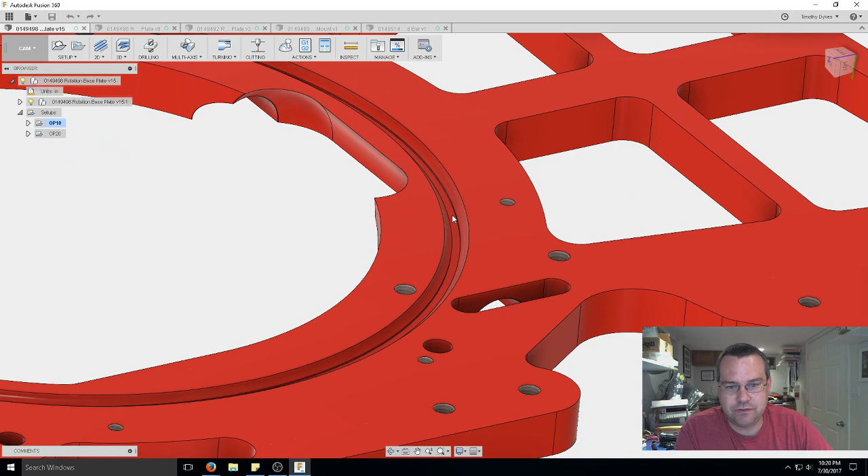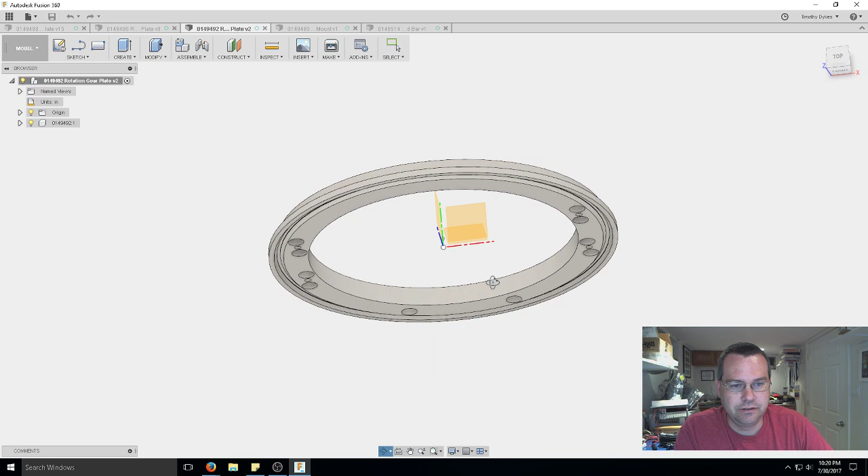experienced machinists. So the way that I was going to hold this down, and this part has to stay fairly flat because this piece is actually a very large bearing race. So they've got this part here. They're going to put 3/16 nylon balls in here, and then they've got this piece here, which is going to be the mating piece to it, and it's got a collar on it, and then the collar bolts into these holes here, and that kind of holds the assembly together.

So both this part and this part need to stay reasonably flat. I mean, it's a high school robot. It doesn't have to be flat within tenths, but it needs to stay reasonably flat. So the biggest problem you have now, this part is 14 inches this way, and it's 8 inches in Y. So 14 inches in X, 8 inches in Y. It's a fairly sizable part. So to get this thing to stay flat during machining is going to be a little challenging.

So I think what I'm going to do is start with, it's 3/8 of an inch thick. So the thickness on it is 3/8, 0.375. That's about 10 millimeters-ish for metric folks. So I'm going to use an oversized stock, and I'm going to clamp the four corners. Now the problem with that is, anytime you clamp the four corners, typically it's going to push up in the center of the plate. So then I'm going to also drill a hole here in the center and put a center hold-down. And I think that should keep it fairly flat.

Now, the other thing that I found is if you get extruded stock versus plate stock, extruded bar stock is almost always warped. I have not received a piece of extruded bar stock that doesn't have at least 20 or 30 thou of warpage in it. Plate stock I found you can get fairly flat. So the other thing I typically do is find which side of the stock is bowing up, and then measure how much it's bowing up, just sweeping an indicator over it. And then I'll throw some shims under it in the center. Typically the corners will be sitting on the table, but either here will be bowed up or it will be bowed up this way. It'll have some bow to it. So I'll figure out how much bow it has and throw some shim stock under it so that when I clamp it down, I'm going to clamp it down in its bowed condition.

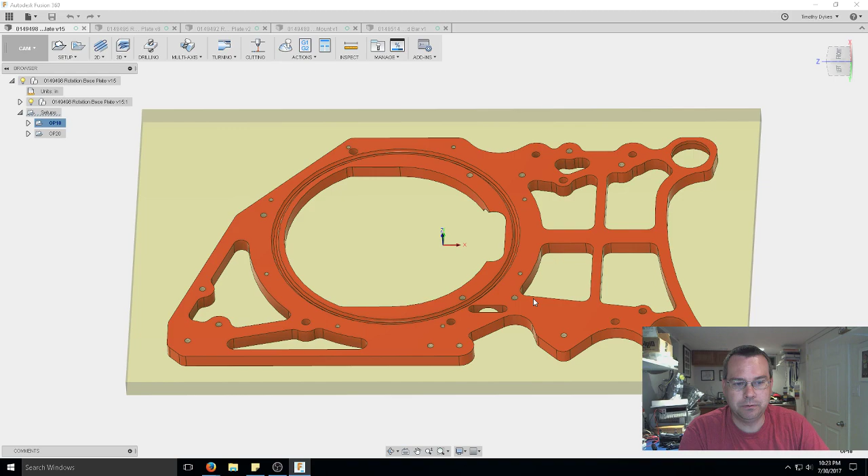So what I found is if you don't do that and you clamp this down, you're going to flatten it out when you clamp it, and then you're going to machine it that way. And as soon as you machine that nice flat surface, when you unclamp it, it's going to spring back, and now your nice flat machined surface is going to be bowed. So you have to try to keep the metal in its relaxed state during your work holding. So that's my thought. And then once you get the first go-around done and you flip it over, now you have a machined flat reference spot to clamp to. So that's my 2 cents on how I'm going to attempt to machine this and get it to come out flat.

Huh, which drill holes, Josh? There's a bazillion of them. So yeah, this part's got a lot of holes and a lot of different sizes. The tool count on this part is nuts. I think I'm up to like 13 or 14 tools.

Oh, thanks, random audio guy.

What are the sizes? So there's a lot of drill holes here. Most of these holes are tapped holes, and all these holes are 10-32. I've actually got most of the CAM done. So all of those holes are 10-32. There are a few holes that are 10-24. Now I asked them, could you order the fasteners that are 10-24 in a 10-32 option? Try to keep everything the same. So I think what we agreed upon is that I'm just going to drill these holes out to a median size that can be tapped with either a 10-32 tap or a 10-24 tap, and just sacrifice some thread engagement on the 10-24 tap.

So those are 10-24s. Then we got a whole bunch of number 6s, so these have to be tapped 6-32. And then we've got some clearance holes for some number 10 screws, so those are those hole sizes. And then we've got some countersinks here. So these are countersinks, I believe, for the 10-24 screws.

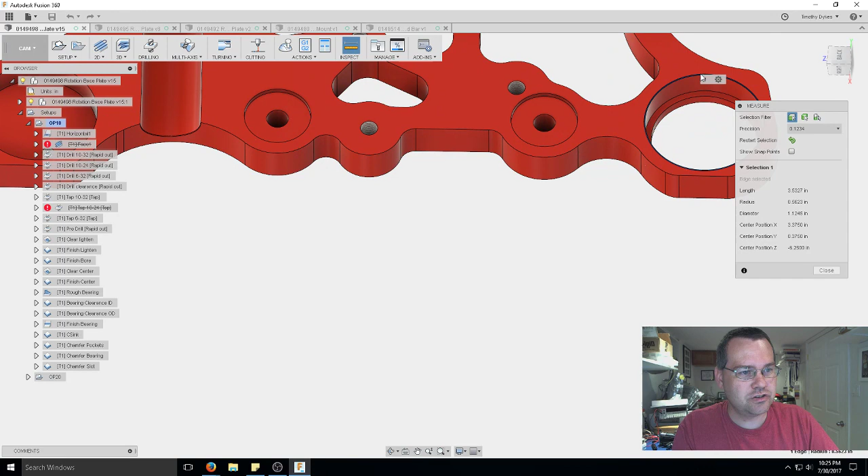And then this bore up here, I believe, is 1 1/4 inches, and that one's 1 inch. Here, let's measure that. So this lower bore is 1 inch, and I believe this upper bore, it's 1 inch on this side, and then 1 1/4 inches on that side, 1 1/8 inches.

So here's the back side of the part. So the back side's even more fun. So the back side has this radius, you know, channel in it. So that, I believe, I'm going to have to ball mill. You know, trying to stand it up on end and do something up on end is not going to be too efficient. So that's probably going to end up getting ball milled.

So yeah, the larger ones are on the outside. Yeah, these are all 10-32s. So yeah, lots of holes. Yeah, you know.

Yeah, Bob, that's exactly what we're talking about, is trying to hold this thing flat and, you know, getting a part this large to come out flat. You know, I'm going to try to get this flat. I'm going to attempt to get it flat within a couple of thou for them.

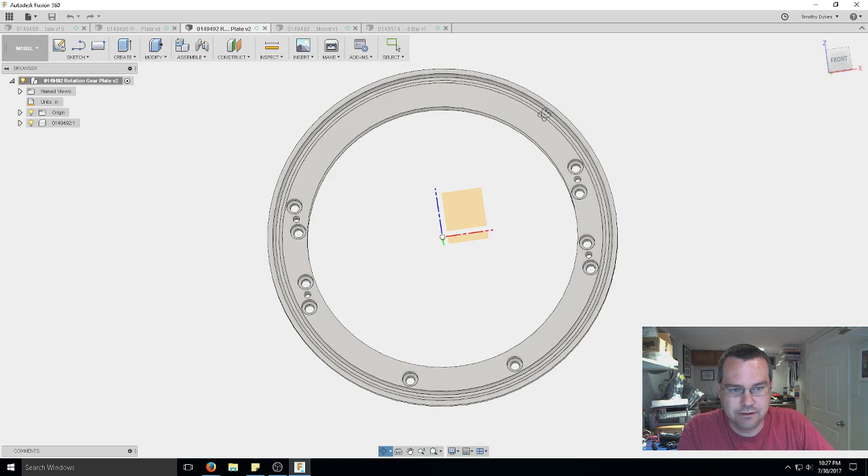There really is no spec, but if you missed the intro here, this groove here, this is also going to be ball milled out, is actually a bearing race. They're going to put nylon balls in it. And then its mating part is this guy here. So then this hat sits, here's the receiving balls, okay? And then this guy goes on top of this guy, okay?

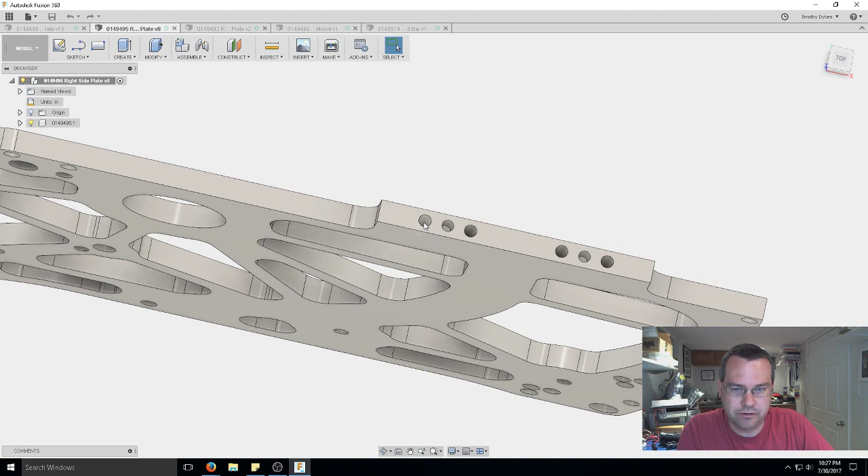So this is the base plate, and then a bunch of motors and stuff mount to this. And then on this guy, you notice these 3 holes and these 3 holes. That's where these guys go. So these are, I believe these are number 8s. These are 8-32s. So then there's 2 of these, and those will bolt to each side of this ring, and that's what makes this thing whole.

The groove in the back is a pain. Are you talking about this groove, Josh? This channel here? Or I'm sorry, Jason? A little bit of lag, not too bad.

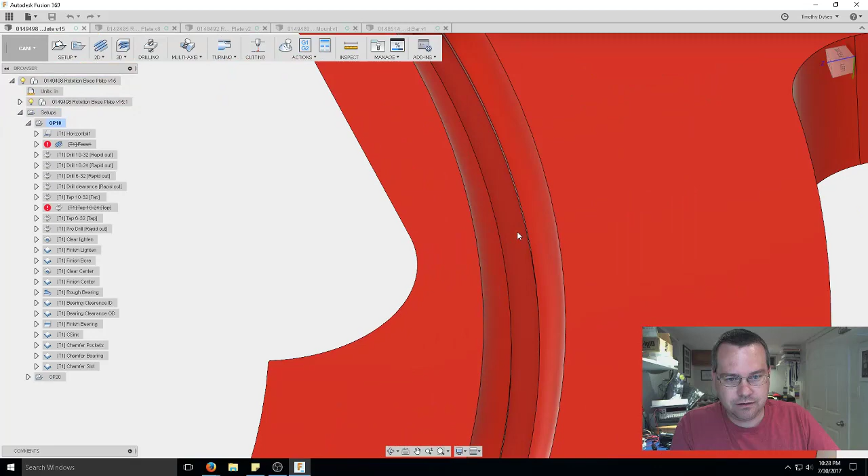Yeah, so my plan for this groove, so this guy here, originally they did not have this groove inside here on the bottom of this bearing groove. So this was a 3/16 dish, and I think what they did originally is they just ran a 3/16 ball mill through here. But there's 2 problems with leaving this without a groove in the bottom. The first thing is that when the balls roll, if the balls are different sizes, they might just contact the bottom center here and not actually contact the edges, so there won't be any horizontal rigidity to it. It will just be vertical.

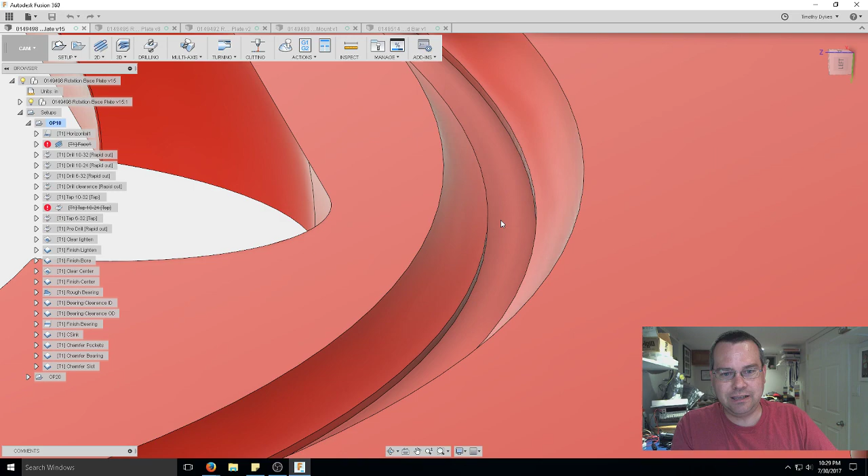So by putting this, and if you look at the design of like a ball screw or a linear bearing, they follow the exact same design where there is actually a relief in the bottom so that the ball doesn't ride on the very bottom of the grooves. It rides on a 45 in the groove. So I added this in here for 2 reasons. One, so that the balls will roll correctly, and then 2, it eliminates the ball mill from having to cut in the exact center of the ball mill. So it'll be a little easier to machine.

But yeah, this part's going to be challenging. It's going to be real challenging. So we're going to make it, and we'll see how flat we get it, and see if it's flat enough. Again, it's a high school robot, so if it's got a little bit of warp in it, I don't think it's going to affect it operationally. It's not an aerospace part, but certainly looks like one.

So if you guys have any suggestions, I know Jason said use the outside holes to bolt it down. Like I said, I'm going to start with toe clamps along the outside perimeter, and then some bolts in the center of it to hold it flat for the initial machining, and then flip it over, and then toe clamp the outsides and then the inside, and then just kind of move my clamps around as I machine.

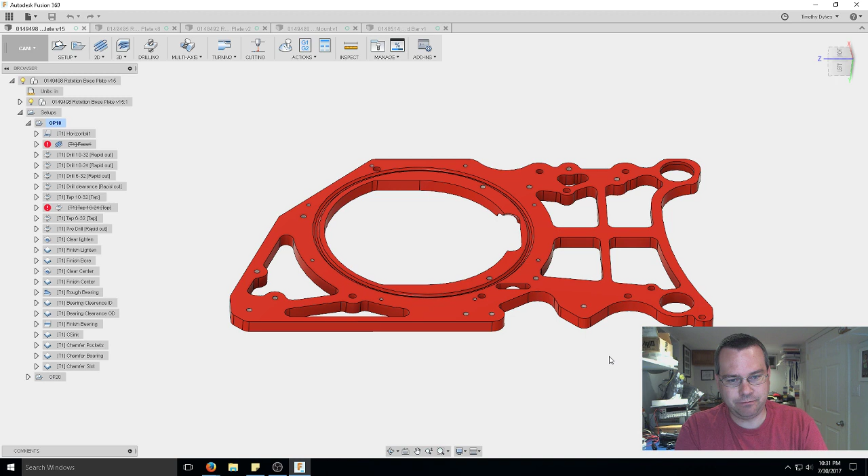So Jose would bring the material to thickness flat and parallel, and then clamp it down and machine it. So yeah, part of my other drive in my work holding is also trying to eliminate operations. So if we machine it and make it flat and to thickness first, and then start with a flat, square, proper thickness piece of stock, that's one thing. If this had a really high flatness tolerance to it, I would just order the material Blanchard ground, and call it a day. But yeah, I think once it's assembled and everything, just machining it should be fine.

Cost and time are very sensitive topics with parts like these. I'm not charging them any money to make these parts. And I'm trying to get the material donated for them, so I might have to end up donating some of the material. But yeah, if it had a flatness tolerance, and it was a paid-for part, Blanchard grinding the material first to get it flat and true definitely would be the way that I would go there, and then lightly clamp it to do all the rest of the machining.

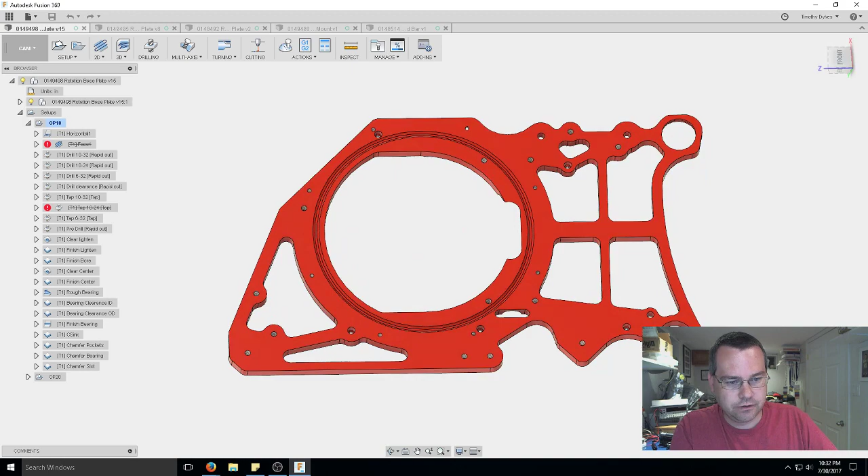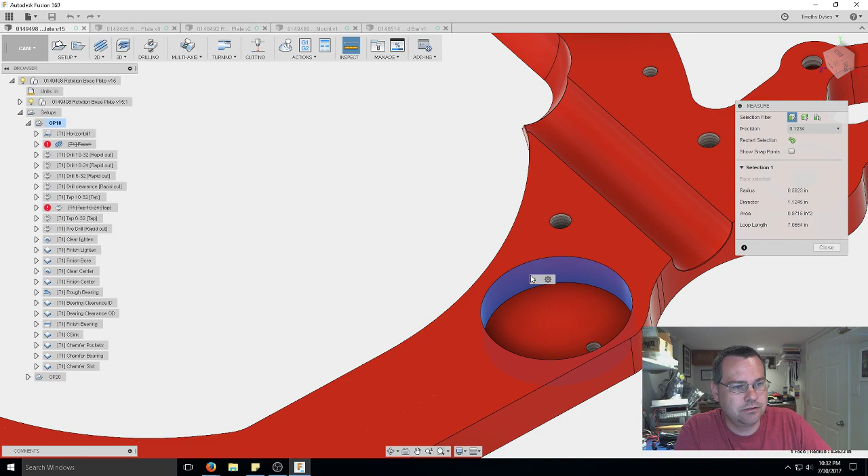For the 2 medium holes, 1.25 inches. This one's an inch on the bottom and 1 1/8 inches on the top. So, but it's a pretty neat part. I like it because it's challenging. It makes you think. I don't know what this counterbore here is for. Here, that one's 1.25 inches. That was the 1.25 inch one that I was thinking of. So there's a little counterbore there.

So Jason, yeah, I thought about vise work. My big concern with putting this in a vise, so are you saying, hold it in the vise this way and clamp here and here? My biggest concern is that by putting pressure on the edges, you're gonna push that material up or down. It's gonna want to bow if you're clamping it on the ends. And I've held parts like this in vises before, and you don't get a lot of rigidity in the center. So if you really go at them with like a facing mill or something that has a lot of downforce, they tend to chatter really bad on you.

So that's the only reason why I don't think I'm going to go with a vise. I certainly could. I just don't know if that's going to work out. I would really like to provide clamping support in the center here. Yeah, I'm gonna clamp it on a pre-machined piece of sacrificial material. That way I can go all the way through the material and get all the holes in it. So my order of operations that I'm thinking here, and I just started camming it, this isn't the final cam.

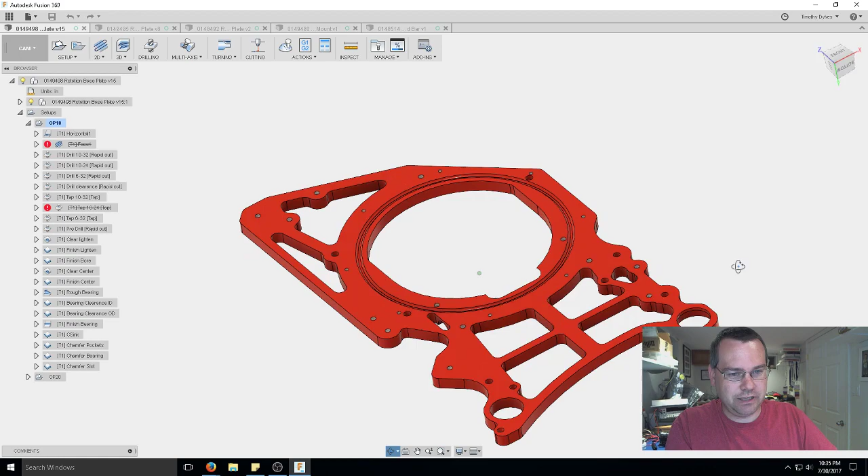I thought about using some tabbing, but I only have one clamp move. So after I do all this internal machining, then I can move the clamps and put them inside these recessed holes, and hold the material down from these IDs, and then I can go to town on machining the OD. And then once I get the OD machined, my plan is to flip the part this way, and then I can use this straight edge as the reference to straighten the part out in X once I got it flipped.

And then I was going to do my offset on this finished borehole, so that will give me a really good reference for 0. So this will get me my straightness, and then this will get me a good 0. And then pretty much on the backside machining, I got to finish bore. I'm going to finish bore this bottom ID, and then finish bore this counterbore, add these counters, add this counter, and then do this slot, and then basically just throw some chamfers on it. So that's kind of what I'm thinking of doing for an order of operations.

Yeah, that's a very good point. Is to pay attention to your retract height. You can very easily knock one of your clamps off when you've got clamps in the center of a part.

What I'm going to do about facing for the second side. So to face the second side, the material should be pretty darn flat already. So my plan is to clamp the outside first with some toe clamps, and then put a toe clamp right here, and then machine around the clamps. And then once I get the IDs all machined around the clamps, then flip the clamps around and clamp it from the inside. So I'm trying to only do four changes.

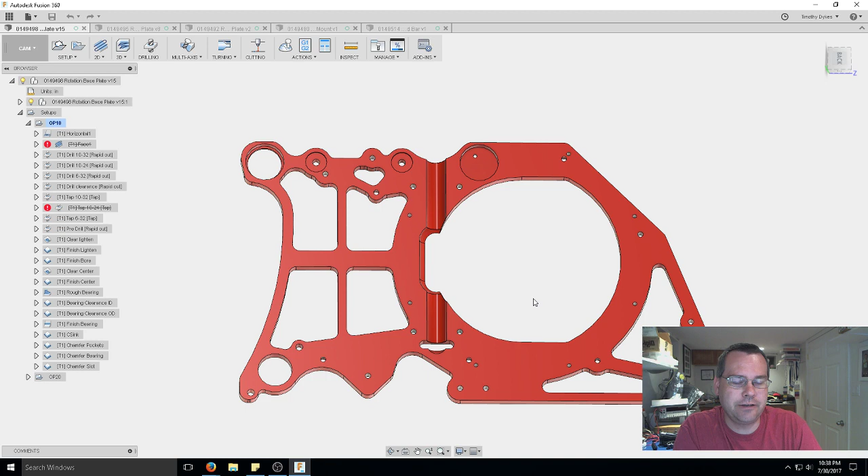Yeah, Jason, I'm thinking about facing both sides first, but again, I'm trying to limit the operations. So if I face both sides first, then I'm moving the material 4 times rather than having to move the material 2 times. You know, that's the CNC side of me thinking. I just try to do the least amount of hands-on as possible. As it is, I think all this machining operation on this side is going to probably run about an hour. So I'd like to be able to just put it in there and press go and come back.

Yeah, Josh, I'll get right on that. Let me go up and talk to the banker upstairs and get a big surface grinder and grind it flat. That'd be a good solution, though. Yeah.

There's guys in my area that have Blanchard grinders, so I could get it Blanchard ground, but I think we're going to be able to machine it flat enough to satisfy the need. But that's my general plan. I appreciate the feedback and the different ideas.

I thought about using some of these holes for bolt hold downs and stuff, but I don't know if using these bolt holes will be any easier, because then I'll have to pre-drill and tap hole locations in the sacrificial material underneath it.

So, Harbor Freight surface grinder. I didn't know Harbor Freight made surface grinders. That would be a pretty cool trick.

Yeah, I hear you, Jason, on trying to avoid the clamps for facing. Trying to use some of these countersunk holes so then the facing mill can just come right across it. I've actually gotten into trouble facing and moving clamps. So this side will be faced all with the exact same work holding, so it'll be an evenly smooth face. The side that I'm worried about is this side, because once I get all the material gone, I won't be able to face it all in one operation with one holding setup.

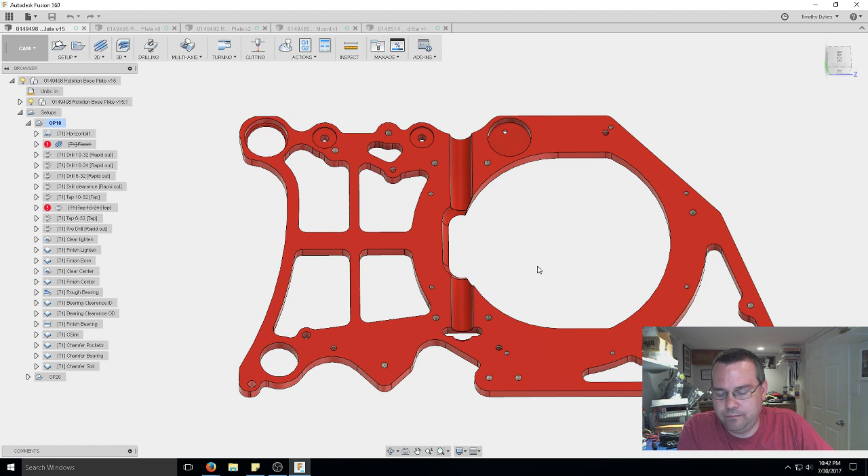You know, that's a good idea, because flatness tolerance, there really isn't a flatness tolerance, Easton. The flatness tolerance is basically driven by this groove. This groove is a mating groove that's going to accept some nylon ball bearings, and we want this groove to maintain pretty good flatness, just so that the top part's not going to wobble or anything as it's rotating.

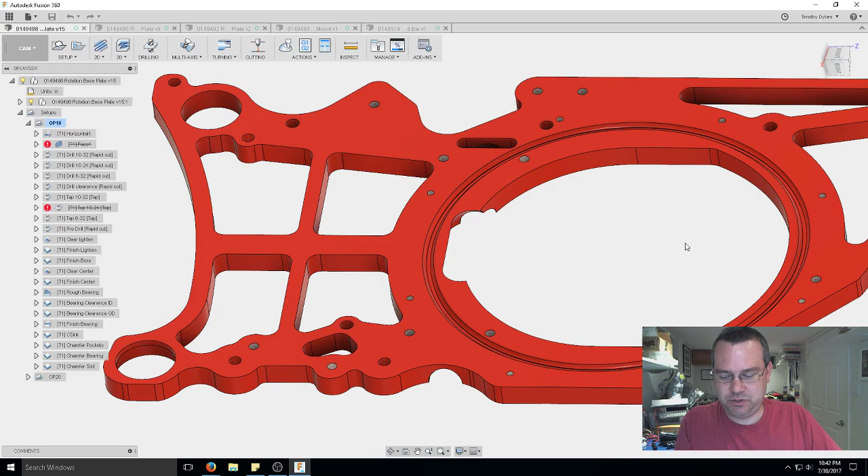But there's really no flatness spec on this, not one that I've been given, but we're going to try to keep it flat. I'm going to try to keep it flat within a couple of thou. So yeah, I'm going to also explore some tabs, but here's what I've been doing for facing. So, here's the, oh, I have to unsuppress it.

So this is one of the gripes that I've got with Fusion with their 2D facing operation. Their 2D facing operation in Fusion gives you no control over where to start, where to stop. You can't tell it, hey, there's a clamp in the way, don't hit it. You can't tell it there's a bolt in the center, don't hit it. So that's one of my big conundrums with the Fusion facing operation.

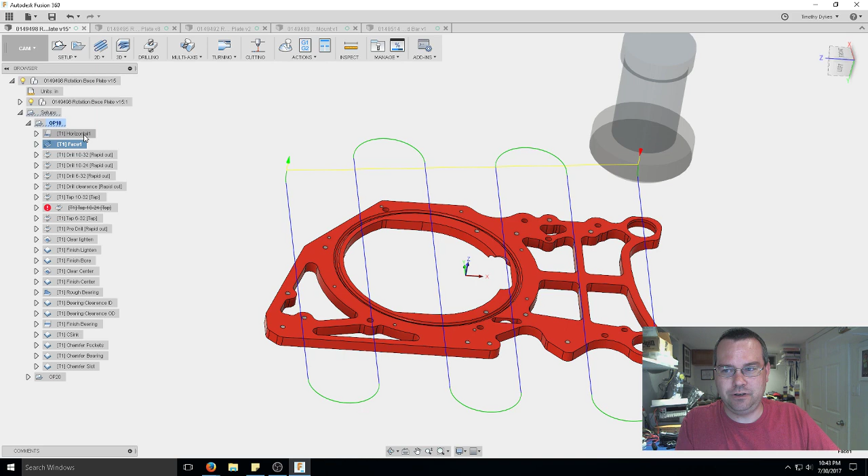So what I've actually been doing a lot with my facing is using a horizontal operation, and I've actually found that it generates a nicer looking part. So it kind of starts in the center and we do a spiral ramp down, and then it kind of spirals out and it follows the contours of the part a little bit. So then your machining marks kind of follow the contours of the part. I think it makes a nicer looking part.

But now with this operation, if I clamp here, here, here, here, and put a bolt in the center, my face mill is not going to hit it. And then with the 3D toolpaths, you can actually specify, hey, this is a piece of fixturing, avoid this area. So I've been actually using 3D toolpaths to do my facing operations.

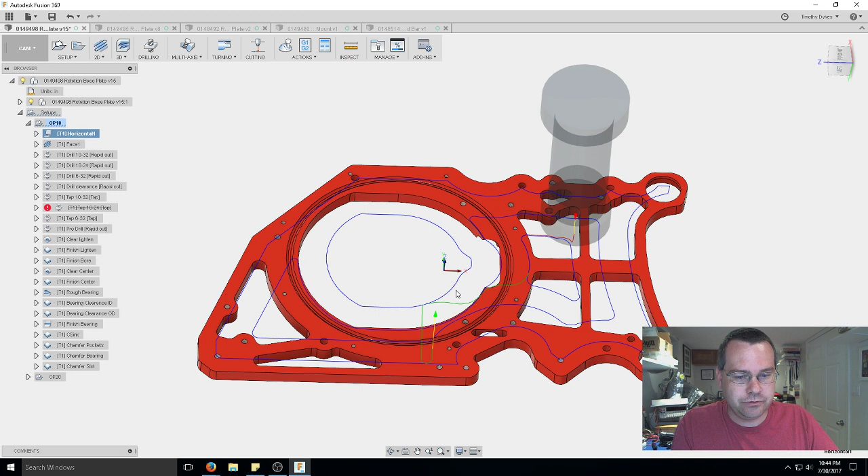Let me catch up on the comments here. How did I do what?

Well, so Easton, this part is a pro bono part. So I'm going to try to avoid making fixturing as much as possible. So basically the fixture is just going to be a sacrificial plate on the machine that I'm going to pre-machine flat so that I can clamp this down to it and then cut all the holes through it without machining my table. So that's the only fixturing that I envision doing.

So does Fusion not have clamp avoidance? 2D toolpaths do not have any clamp avoidance at all whatsoever. The 3D toolpaths do. So, yeah, so the Pierson Workholding, they do the vacuum tables and stuff. So the vacuum table would be cool for this part, but I don't have one. So I've got to work with what I've got today. But having a vacuum table is one of the things on my list to get, because the vacuum table would be pretty nice.

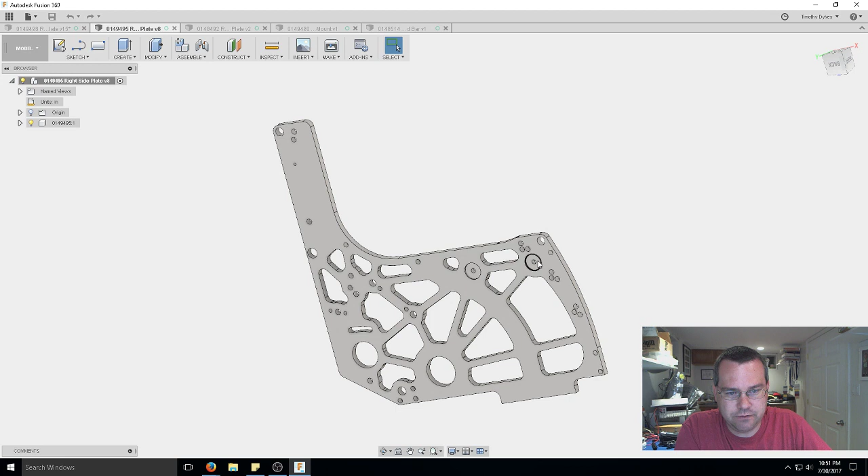So these other parts, I don't think are going to be quite as bad. So this is the vertical member. Again, we just got a whole bunch of drill clearance holes, tap clearance holes. This part is 10 inches from top to bottom and 10 inches left to right at the bottom here of this curve. So this part's a little bit smaller, and this one's less critical because this is just the side support. I believe a bolt goes here, here, here, and here, and then this is supported by the plate. So as they bolt this one together, it will pull itself into the correct dimensions as needed.

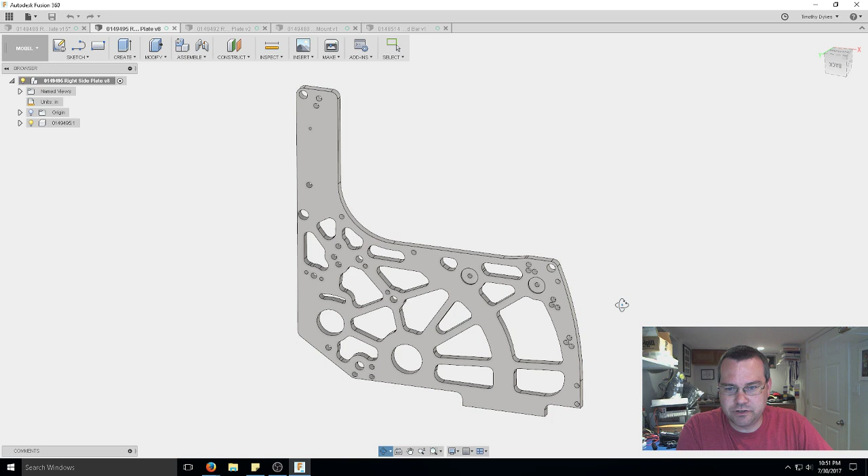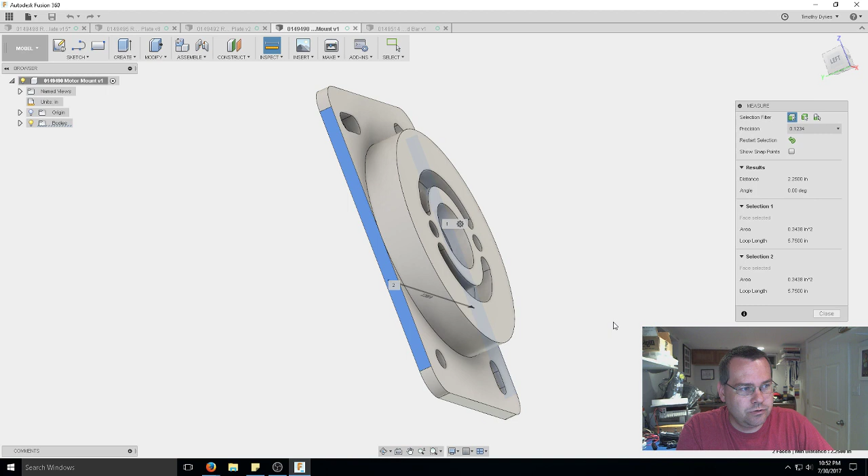So I don't think this part's going to be too bad. And there's two variants of it. And then we've got this part. This part's pretty easy, it's just a vise part. This is about 2 1/4 by 3 1/4. So that's a 2-op vise part. Not much to do on that one.

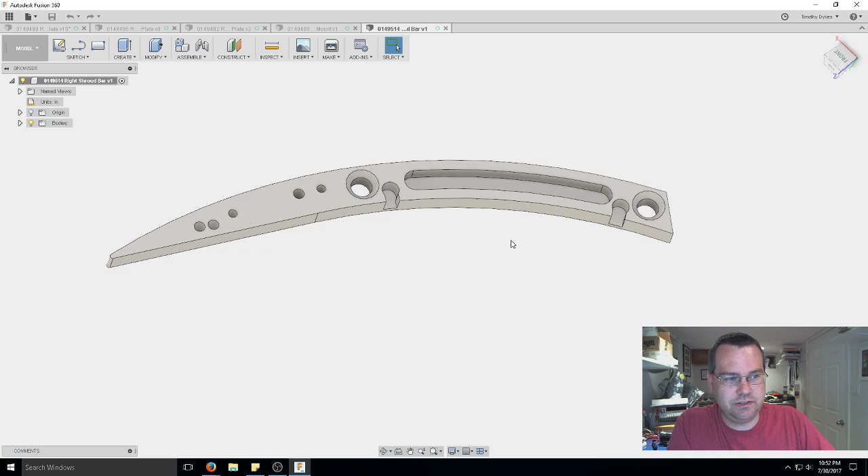And then these ones are a little bit interesting. I'm going to make these out of bar stock in a vise. This is definitely going to be a windowed part, but there's really no back machining needed. So I can do this in one op on the front, and then just hand deburr and hand chamfer the holes on the back after I'm done.

Did we lose it? Did I lose the stream, guys? Well, looks like we're okay.

Yeah, I would love to have a laser or water jet. That would be great. So T-slot edge clamps or Mitee-Bites to flatten the sheet before using the vacuum table. Oh, okay, Shane. To initially machine it flat and then you plop it on the vacuum table.

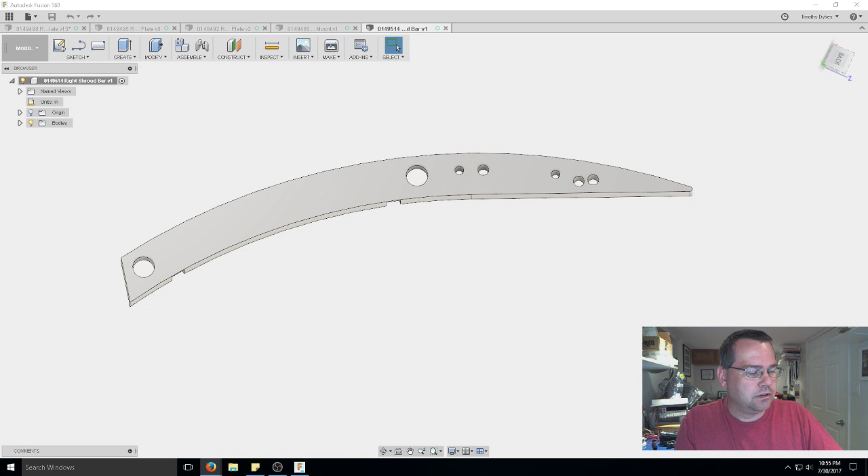Yeah, so I asked permission to show all these parts ahead of time. So I have permission to film all these parts. So I'm going to do videos on making each one of these parts so you can see how I actually made it, and then I'll show you the finished product and how it actually turned out. And then everybody can try to learn a little bit more from it.

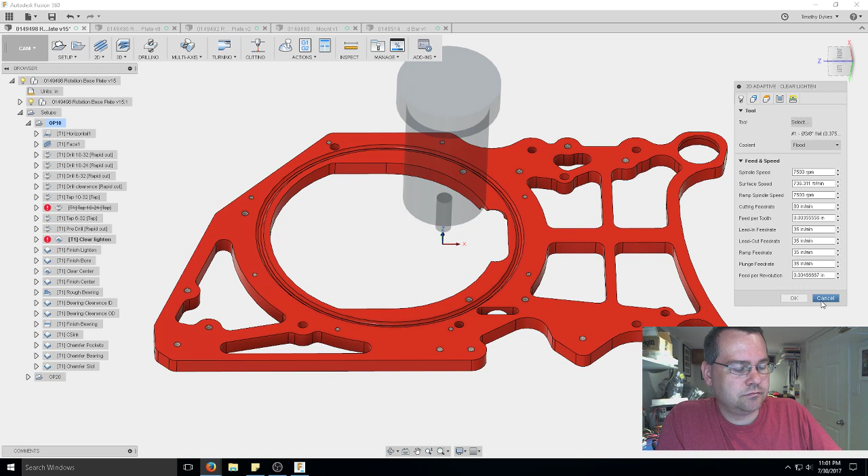Yeah, GWizard's pretty good. GWizard will actually give you an estimated tool deflection based on your cutting parameters. So you can tell it what cutting parameters, what depth of cut, width of cut, what tool you're using, what material the tool is, what material you're cutting, and then GWizard will calculate a rough horsepower estimate and also a rough tool deflection estimate.

I did find that the GWizard calculator sometimes can be very conservative. So if you have really good rigidity, it's pretty conservative. But other times, depending on the rigidity of your setup, it can be aggressive. So it's just a rule of thumb. You've got to get your setup going and see how it works. That's what feed override pots are for.

Monster, the machining tool that I used. Are you talking about my machine in general, the Fadal VMC 15, or are you talking about that little brick that I used?

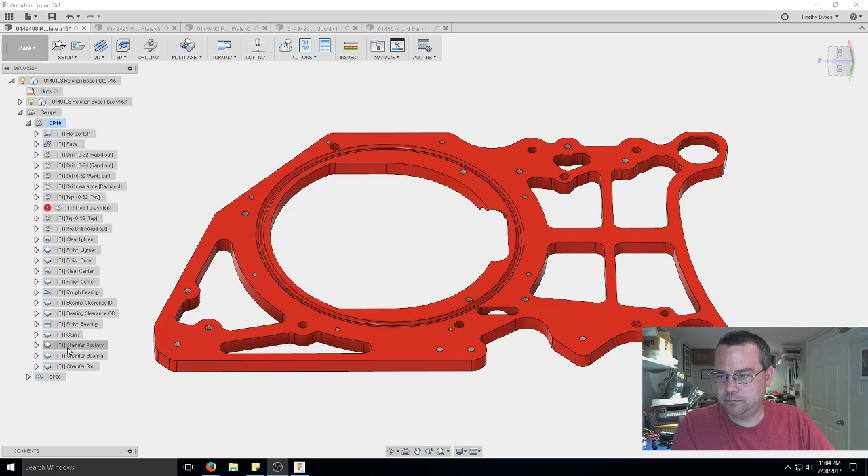Yes, so Fusion 360 will do ramping. Let me switch back to that. So specifically, where am I doing some ramping? There we go. So there is a helical ramp in, and then you can control that in the linking tab of almost all the tool paths.

So here is your ramp control, and you can tell it what type of ramp that you want to do. You can plunge, helix. There's some other options depending on which tool path. You can tell it the angle that you want it to ramp in and the diameter that you want to ramp with. So this is in every single tool path that I'm aware of. Almost all of them ramp.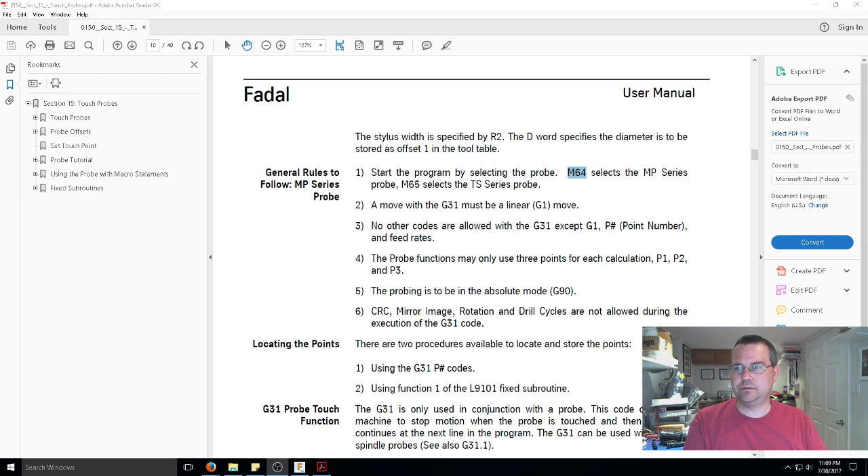I'm trying to find where the probe is, where they talk about the probe operation. Is it the macros? Oh, I know it's in here somewhere. Okay, here it is. I found it. Okay, so this is in the Fadal manuals, section 15 on touch probes. And this is page 348.

So this only applies if you wire the probes in the way that Fadal expects you to wire them in. So the probe select M64 will energize one of the specific M output relays on that 1100 board that I showed. That's the one where I stuck the pins in the sockets on the raw circuit board. So M64 energizes an output, which will then set your MI8-4 to route the touch probe to the machine probe contact. There's only one input on the machine that says probe touched or not touched.

So M64 will route the touch probe to the machine, or if you call an M65, it will turn that output back off, and then the MI8-4 will route the touch tool setter probe to the machine's probe input. But this only works if your probe is installed the way Fadal expects you to install it. Then there's a second set of M codes, M66 and M67, that are used to trigger the start pulse to turn the touch probe on.

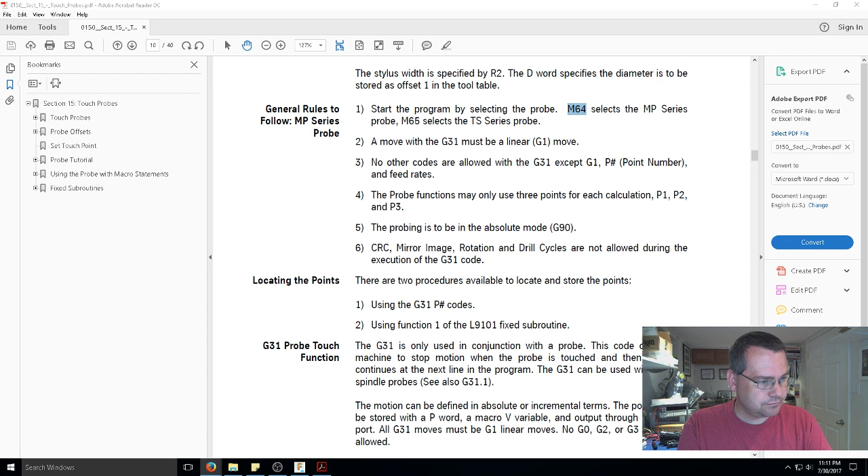So M66, when it's called, will turn on a different output, and then that sends the signal to the MI12 to send the start pulse to the optical probe to turn it on. So that's where the M codes come from, to select touch probe versus tool setter, and then to turn the optical probe on when you want to start using it. So those are the values. But again, you got to wire it the way Fadal expects you to wire it. So does that answer your questions, Bob?

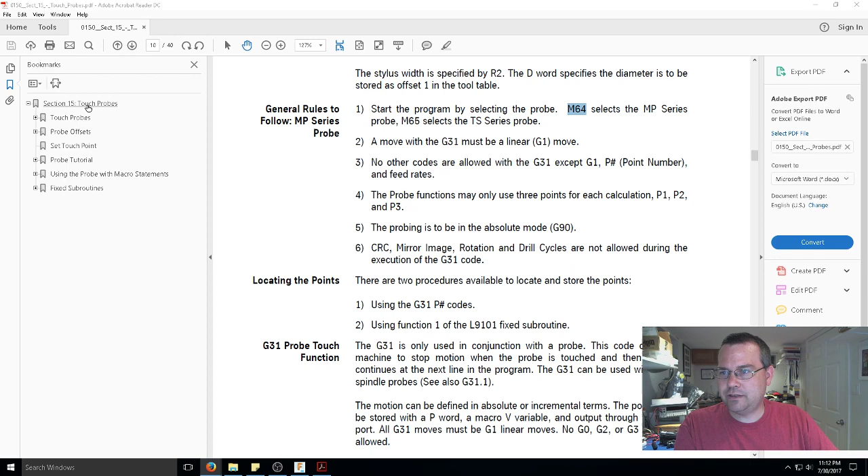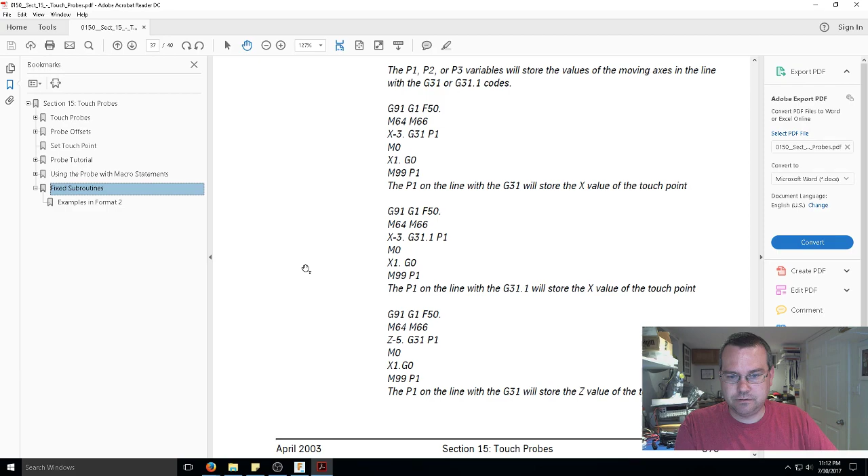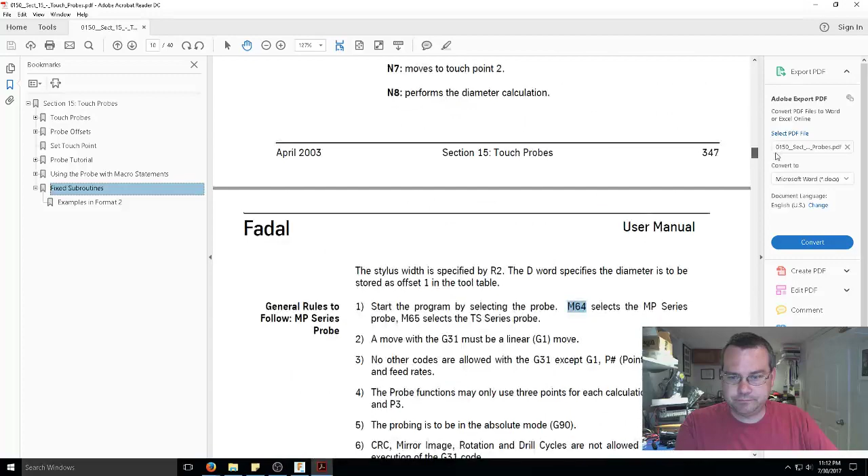Yeah, so Fadal has specific macros. Well, they have specific L macros in here somewhere. Oh, where are they? Hold on, I might have to find them. Hold on 1 second.

Shane, what did you add to your post processor for the warning? A specific ramp speed? Is it because the helix is too small in diameter with too high a feed rate, and it's exceeding basically the speed of the servos?

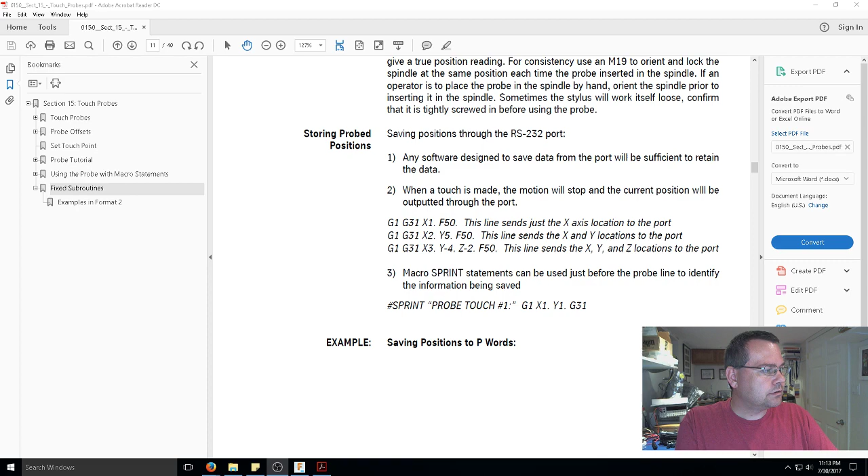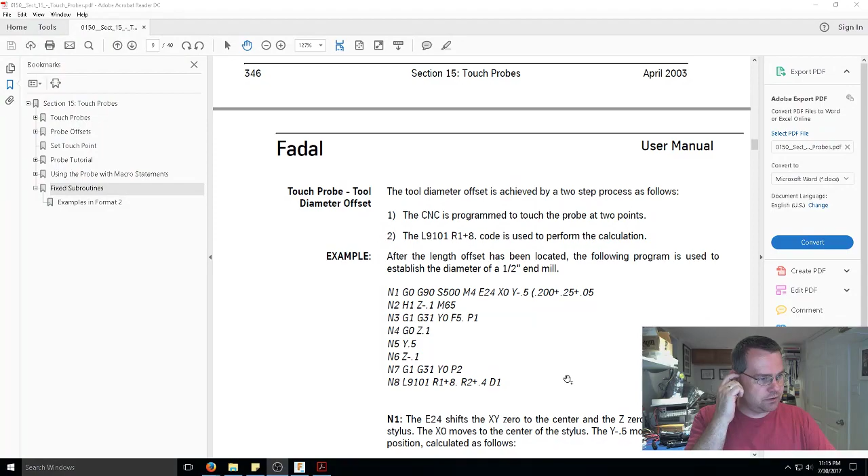Hold on, let me look for the macros. They're the L9101. So supposedly it's still in the same section for the probe subroutines internal to Fadal.

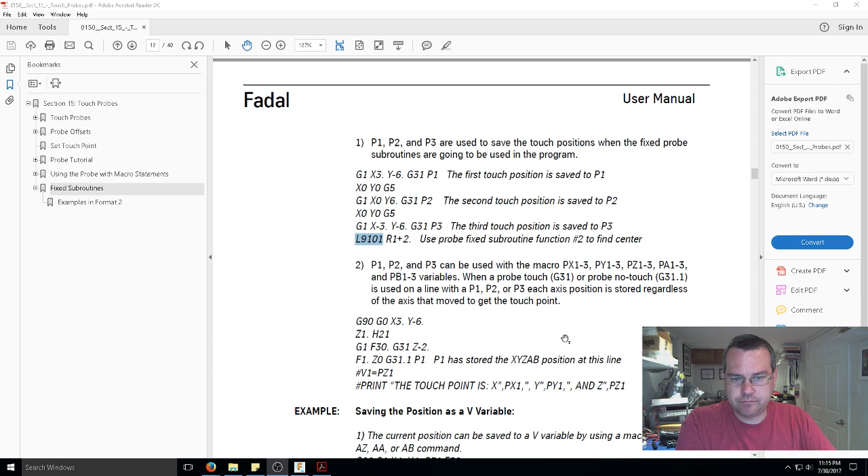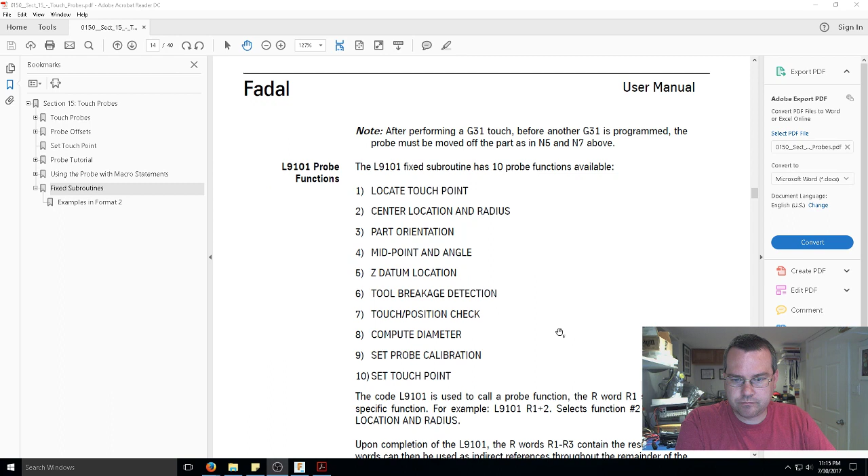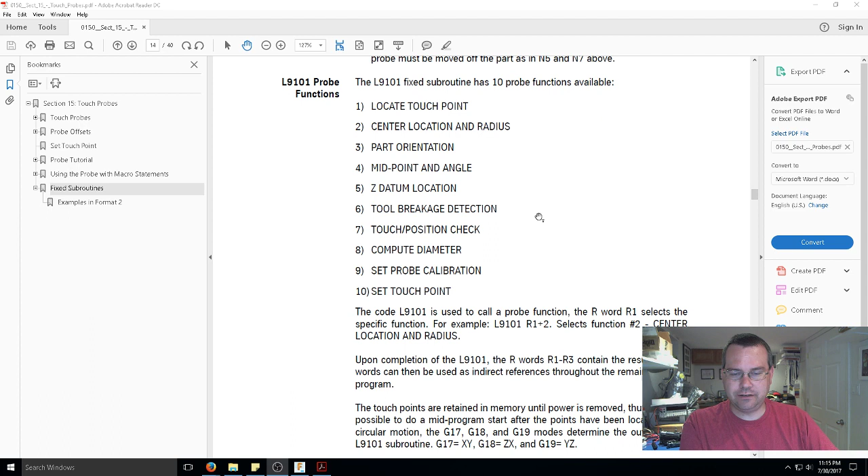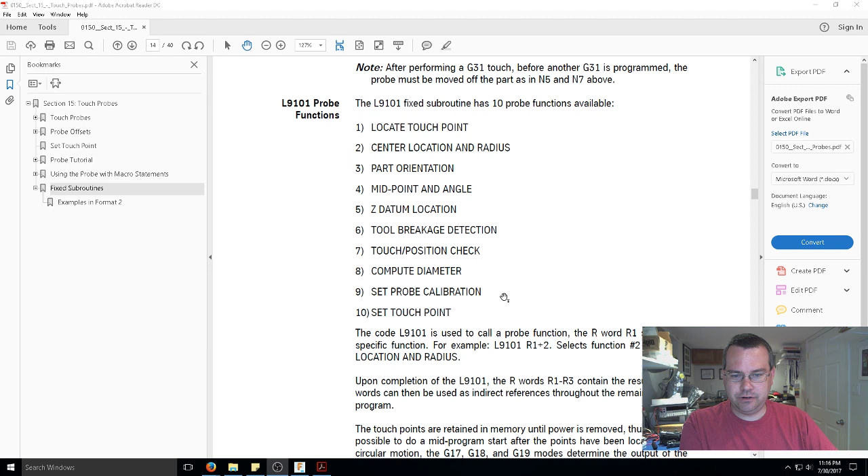Okay, so the L9101 probe functions, and there's 10 probe functions available. Now these are the probe macros that are built into Fadal, and I don't think you have access to look at these. I never checked. We can look. So one of them is locate a touch point, center location and radius, part orientation, midpoint and angle, the Z datum. There's a tool breakage detection automated routine, computed diameter, and then there's a probe calibration, same thing that you have to go through with Renishaw. So those are the Fadal macros that are built into the machine for you.

The Renishaw macros are actually separate files with separate O numbers, so they're actually programs that are written for Fadal using Fadal's macros. So that's the Renishaw stuff, and they're huge. They're like 45K, I think. I mean, it would have filled the entire machine memory if I didn't upgrade it.

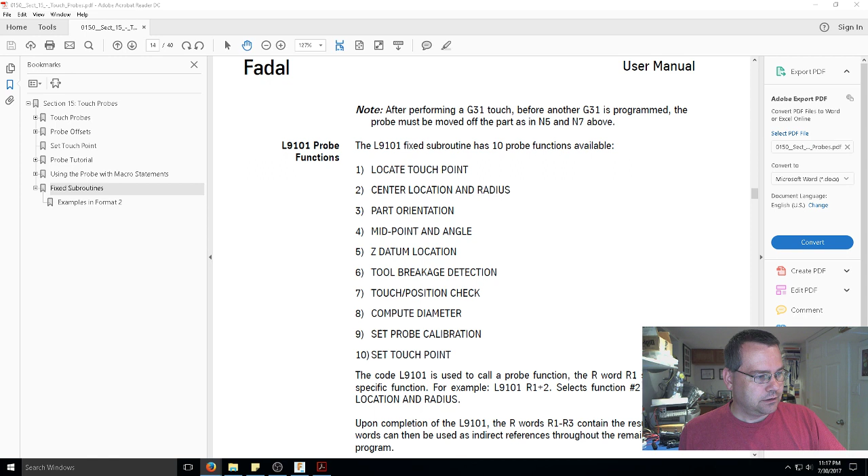Monster, are you talking the probing functions with Fusion?

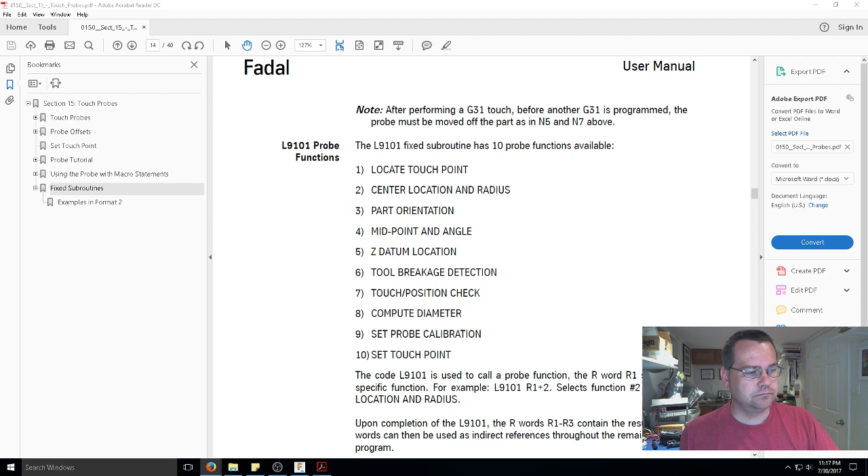So that is the one thing that I don't know. I don't know yet. I did not look into that deep yet. I was going to get the probes working by hand. But yeah, if we go back to here, they now have work touch probes set up, and you know, you've got to pick a probe point, and it'll just go to town.

Now, what I don't know, the thing that's questioned in my mind, is I think the post processor needs to support this. Here, let's select a probe. I'll just select a probe. Yeah, I think the post processor has to support this, and I don't think the Fadal post does yet. So this is one thing that I've got to look at. But yeah, supposedly in Fusion 360 they put the probing routines in here, so you'll be able to probe a part. You know, I don't know exactly how it all works yet, but that's on the list of things to crunch through.

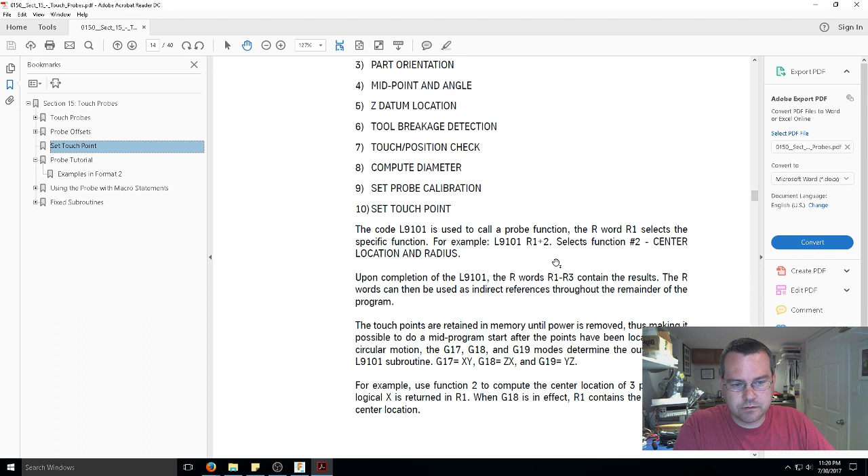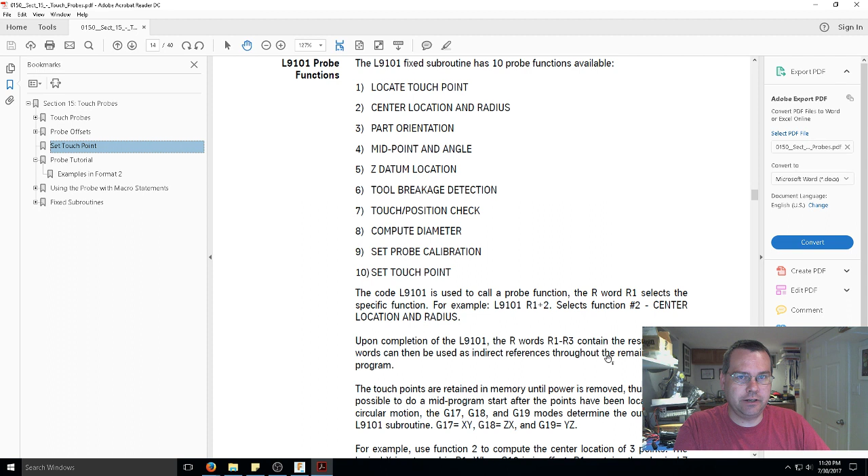Oh yeah, it doesn't set the work offset. So what you would have to do is, it's going to leave your points in the R words, and then in your program you'll have to write a little piece that would take the information from the probe and then apply it to your work offsets correctly. So I know for a fact the Renishaw macros do update your work offsets, and they'll also feed back data to your tool diameter offsets.

So like if you machine a bore and you probe the bore and it's a little undersized, you can feed that information back into the tool diameter offset table so that it will tweak the tool diameter offset based on the measured part, and then you can come back and run another circle around it with the new diameter offset, and then it should bring it to size.

So I was actually surprised at how thorough and complex the Renishaw macros were, allowing you that real-time feedback of going in, probing the diameter of the bore, feeding that back into the tool offset table, and then you can run a cleanup pass on it to bring it to size. So that was pretty cool.

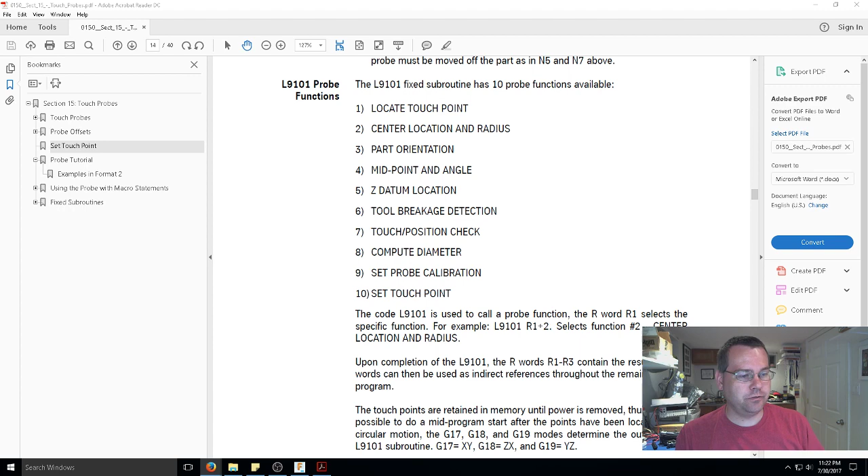Yeah, I'm still working on debugging a new post for Fadal. I almost have it all done. I've been trying to run through all the permutations of it, which you can imagine there's a lot of. Trying to do as thorough of a job as I can of testing it. I've been a little behind the ball on that one because I've had so much other stuff pop in the way. But yeah, all of this stuff will be in videos at some point.

I still want to make more. This summer I intended to make electrical videos talking more about the electrical aspects of the machines, doing the gain and zeroing, balancing offsets, and talking about how the motor drives work and all that stuff. I just got derailed by this probe project, but that's okay because I think a lot of people are following the probe project and are enjoying it, so not a big deal.

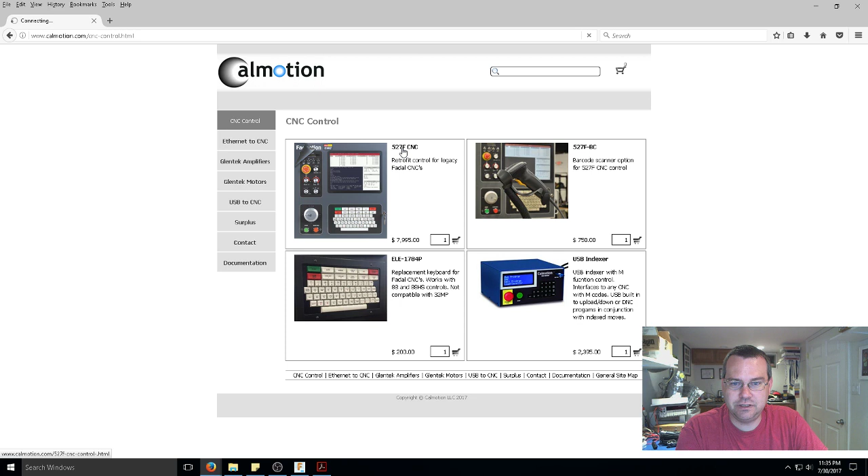Yeah, but there's the CalMotion. Now the other thing that I noticed recently, I don't know when they started coming out with this, but CalMotion is making this 527F CNC controller, and this one really grabbed my attention. And the reason why is because this is a plug-in replacement for the Fadal 88HS controller.

And when I say plug-in replacement, go to their website and watch their videos. They literally pull out the original old Fadal cards, just like I did on my board swap video, and they plug new cards into the original card file. And within about 10 minutes, they've got the machine up and running using completely new controller cards, and it looks like it works awesome from the videos that they showed, and it's only $8 grand.

So if you look at any other controller upgrade for a CNC machine, you're in the $30,000 to $35,000 range. So this is a huge controller for $8 grand, and it supports AC machines and DC machines. So this one really caught my attention. I would love to get my hands on one of these and review it.